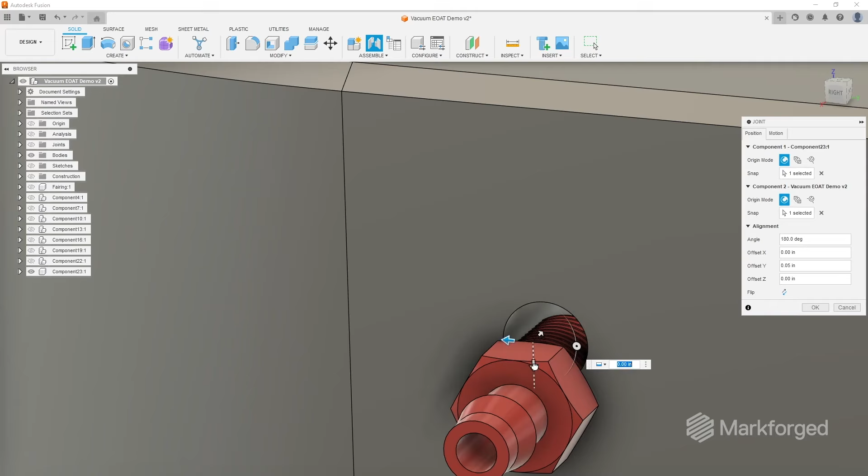Going from a design to an actual part you can use in your manufacturing process is easier than ever. But how can you quickly design a custom part that also utilizes off-the-shelf components?

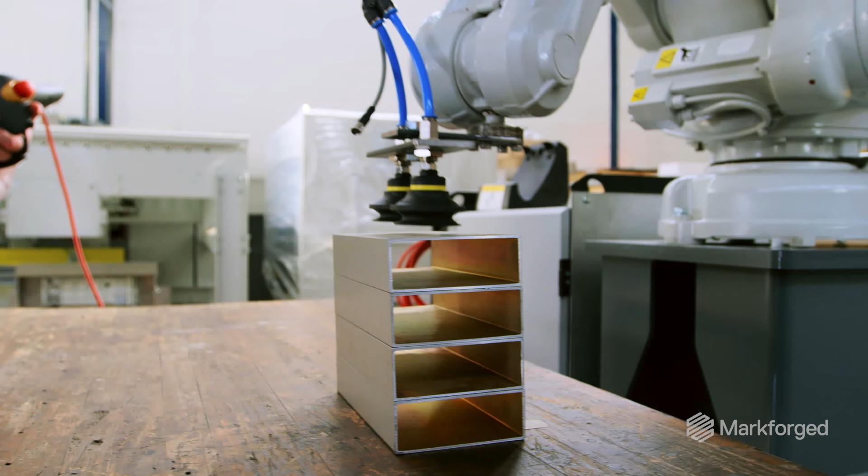So what's a vacuum gripper? A vacuum gripper is a type of end-of-arm tool, also known as an end effector. They're typically used in manufacturing lines to perform a specific function like lifting or sorting items.

Today, we're going to be showing you how you can quickly make a strong custom printed part like this. We'll do a deep dive into the design considerations you need to make when designing for additive, like how to design internal chambers that maintain strong air suction, how you can design features to be compatible with off-the-shelf hardware, and how to properly utilize support overrides to your advantage.

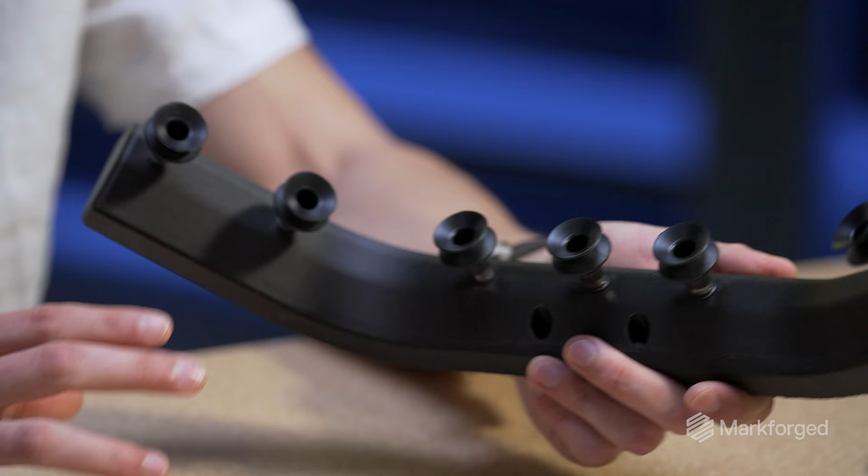By the end of this video, we'll come away with a single part that's strong, reliable, and can be quickly installed. First, let's go over why this works so well as an application for 3D printing. First and foremost, 3D printing offers a pretty wide range to customize your fixture based on your needs. This means you can make something unique to your specific use case or product that will do the job perfectly every time.

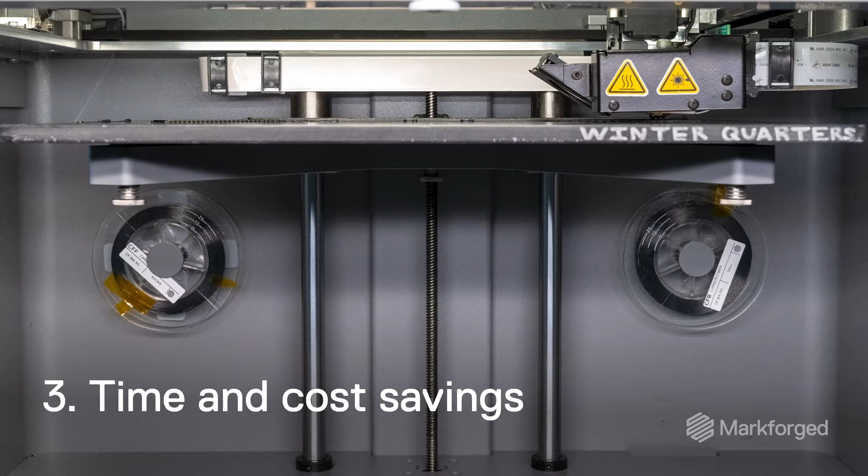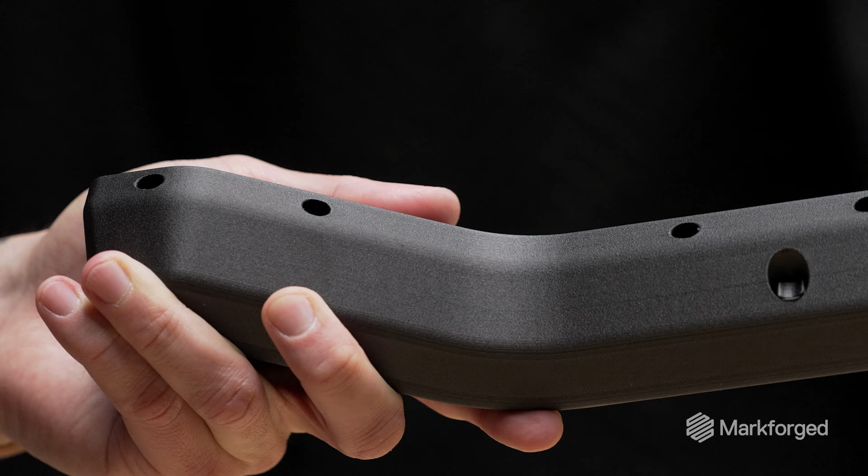Next is the ability to reduce weight. 3D printed parts tend to be lighter than machined or off-the-shelf solutions. Heavy fixtures can put strain on a robotic arm and increase manufacturing cycle time, or require an even larger and more expensive robot to get the job done. Speaking of expenses, 3D printing can drastically reduce the amount of time spent machining or building the right fixture for the job. Lastly, 3D printed parts for end-of-arm tooling allow for simplistic designs that can reduce the amount of failure points.

Take a look at this example part. Say we want to lift this part during the manufacturing process and transport it from one point to the next. The best way for us to do that would be using a vacuum gripper that would make contact with the product and raise it to its next process. While we conceptualized this application, we knew we'd need to incorporate some off-the-shelf components, such as vacuum cups, heat set inserts, and tube fittings. So I'll be sure to share exactly what we used. Let's dive into Fusion and start designing.

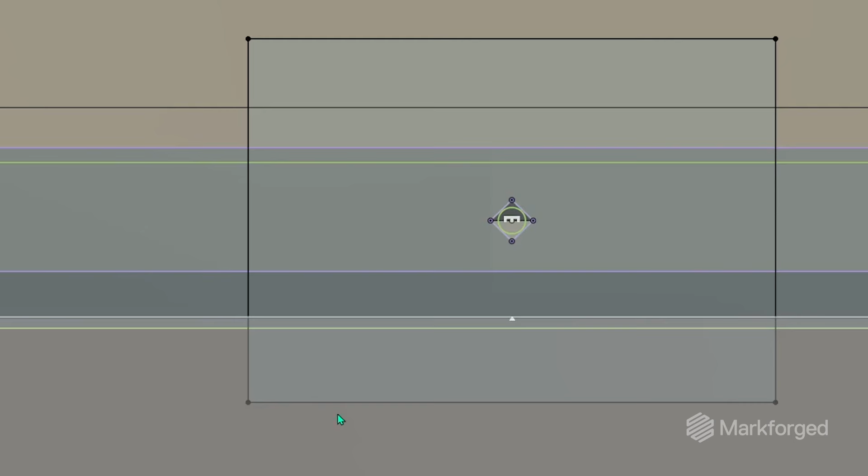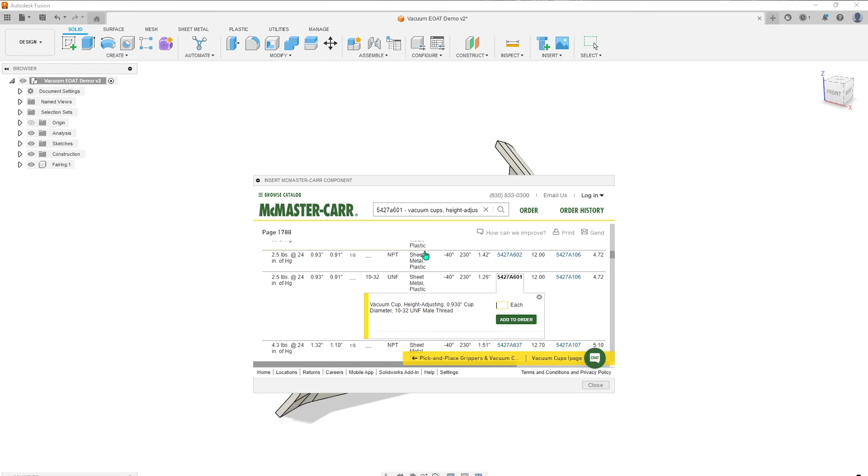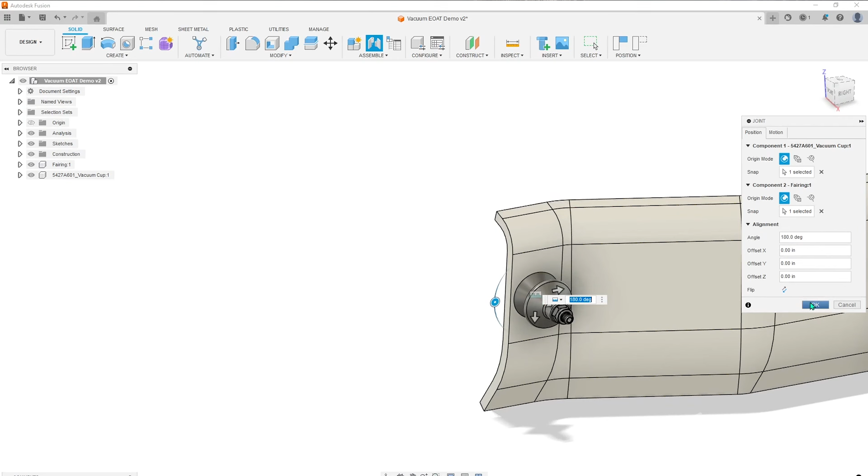So we're in Fusion 360, and we've got our part that we're going to be moving along the factory line. So starting off, we're going to be using our Insert McMaster-Carr component feature. In here, I'm going to be looking up our vacuum grippers that we'll be using and importing these as STEP files. We're going to do some initial rotations on the component so that it's set up for some mates. We're going to do this 6 more times until we have vacuum cups along the full length of this part.

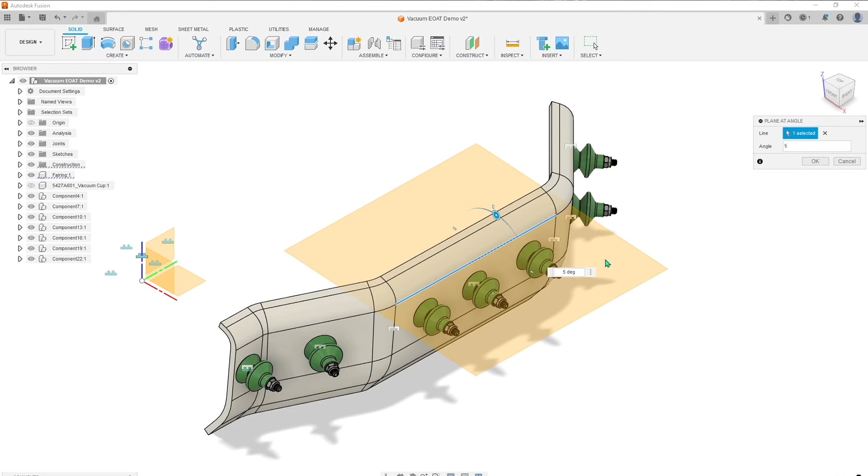Once we have our vacuum cups joined to the component, we're going to start creating some planes so we can start sketching out our vacuum gripper. To create a plane, we're going to go through our Construct menu and choose Plane at Angle. Select our reference line off of the part. We're going to make a slight adjustment of 5 degrees so that the plane is perpendicular with the inlets of the vacuum cups. Once we have our plane, we're going to go through the Construct menu and offset the plane from the one we just created. We're going to make an adjustment of 1 inch just below this one so that this plane is aligned with the inlets of the vacuum cups.

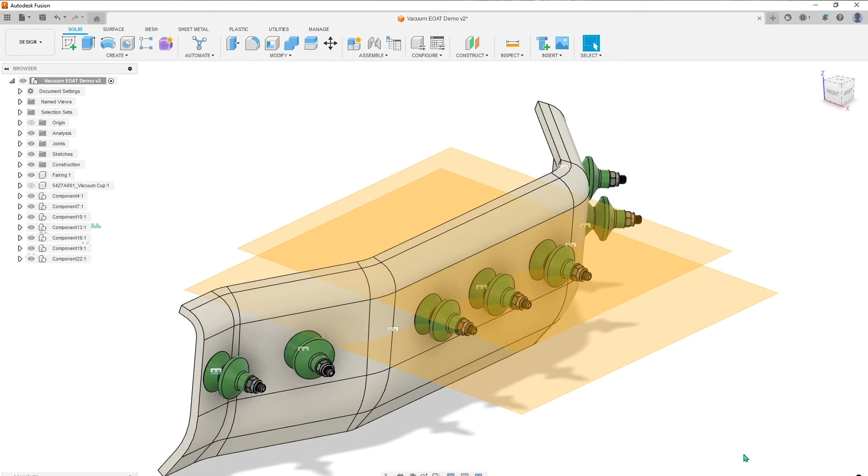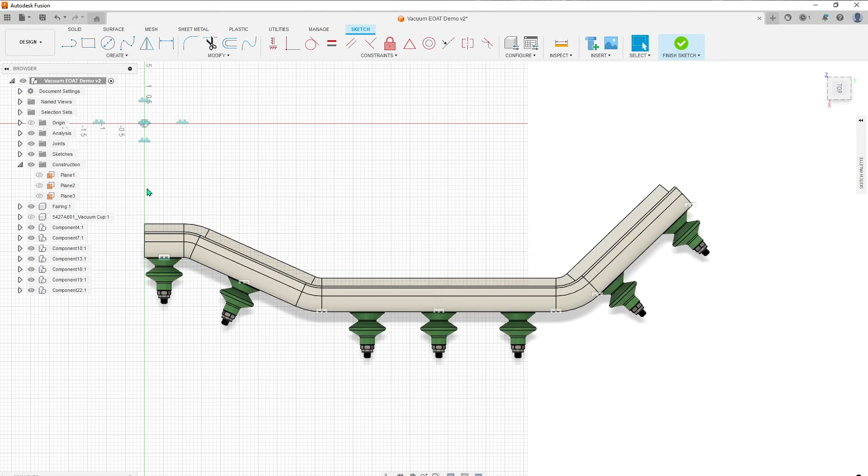So now that we have our 2 planes, I'm just going to hide this top plane here. For our next steps, we'll just be using this middle plane. I'm going to use Create and Create Sketch. From here, we'll start designing and building out the geometries for our printed part. Within our sketch, we're going to create some projected lines from the inlet fittings of each of these vacuum grippers. Once we have our projected lines, we're going to create some points.

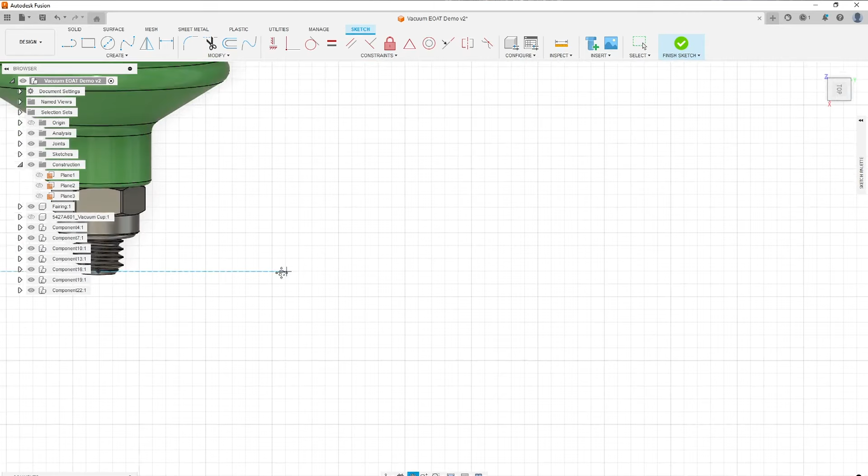From here, we're going to create some lines so that we can offset the distance. We want these lines to be offset from the grippers by an equal distance. So we're going to go in, we're going to add some sketch dimensions. We're going to offset these by 1/2 inch. Once we constrain one, we're going to be using our constrain equal tool to make all of these lines the same length.

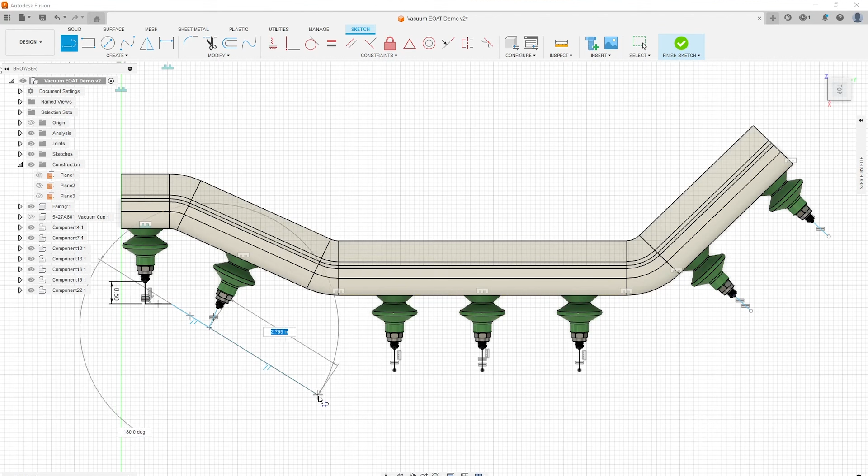Now that we have our lines offset from the cups, we're going to start building out some sketch lines for a 3D printed part. Let's speed through this. I'm going to exit out of the sketch now that it's done, and we'll move on to our next steps.

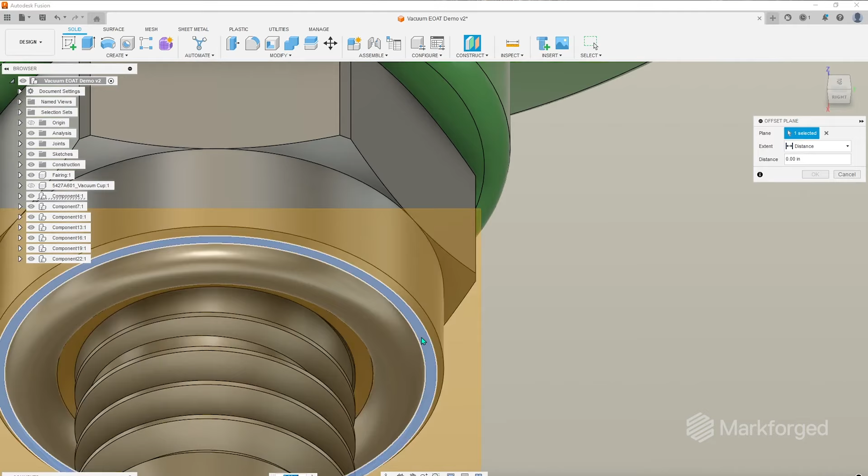So now we're going to create planes off of each of these vacuum grippers so we can start creating the 3D printed part. I'm going to use just construct and offset planes, and I'm going to be selecting this flat surface on each of these grippers.

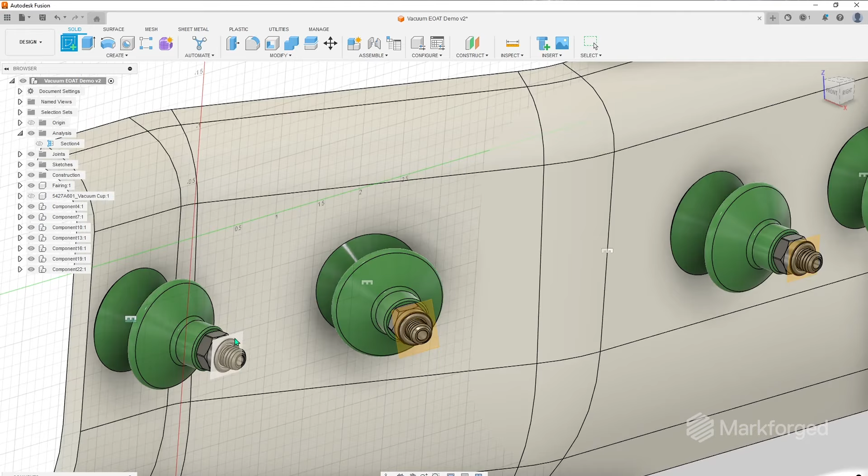Once we have our planes made at the ends of each of these vacuum cups, we're going to be creating sketches for each of these for the internal chambers that will be going into our printed part. I'm going to start with doing a create sketch, and let's use one of these planes here. I'm going to actually project this circle so that I can get a center point and use this as our reference.

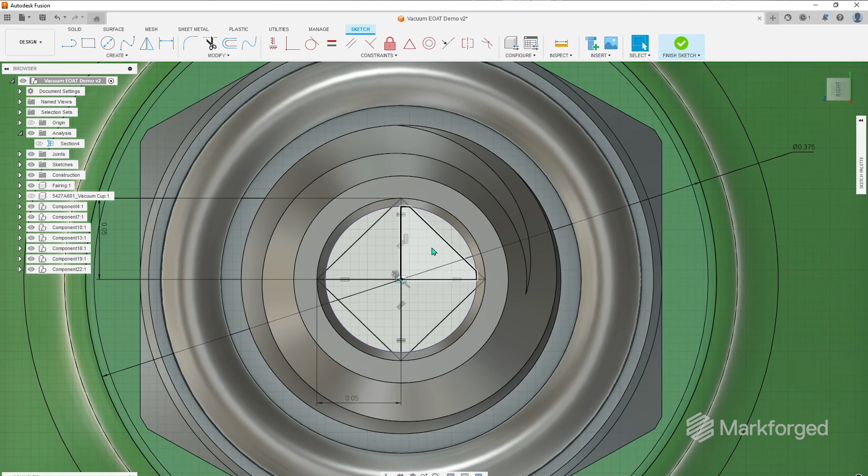So I've added in this diamond shape in here with 45-degree angles. The reason for this is once we're printing, to avoid overhangs for a printed part for internal chambers, we want to keep these angles greater than 40 degrees so that supports aren't automatically generated. Once we've done the sketch on one of these, we're going to do it for each of the planes going off of these vacuum grippers.

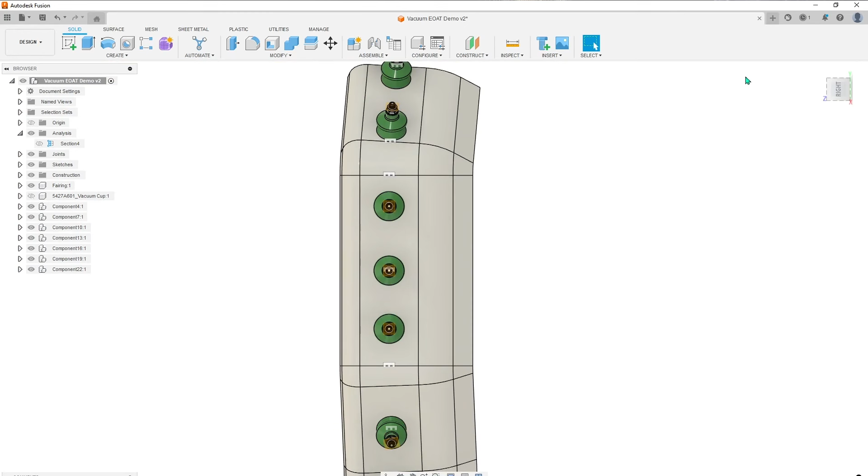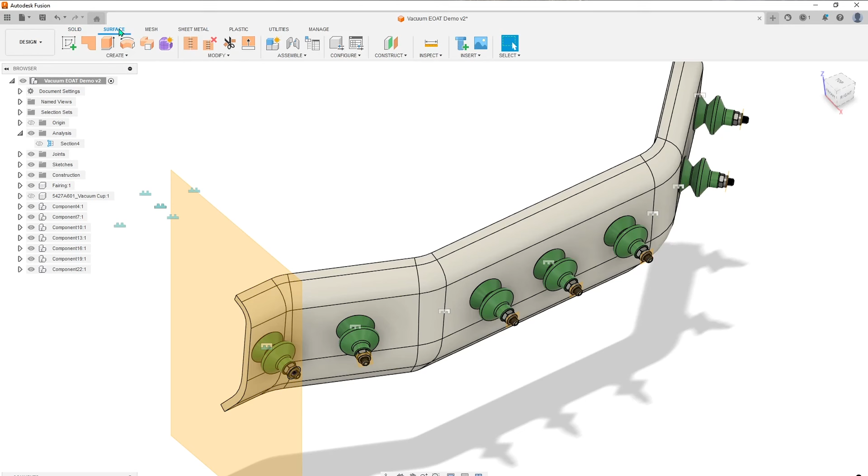Now let's focus on building out some geometry for a 3D printed part. I'm going to start by creating another sketch plane off the edge of our part that we're moving along the assembly line. Next, I'm going to create some offsets from the component here. I'm going to go to the Surface tab under Create and use our Surface Offset option.

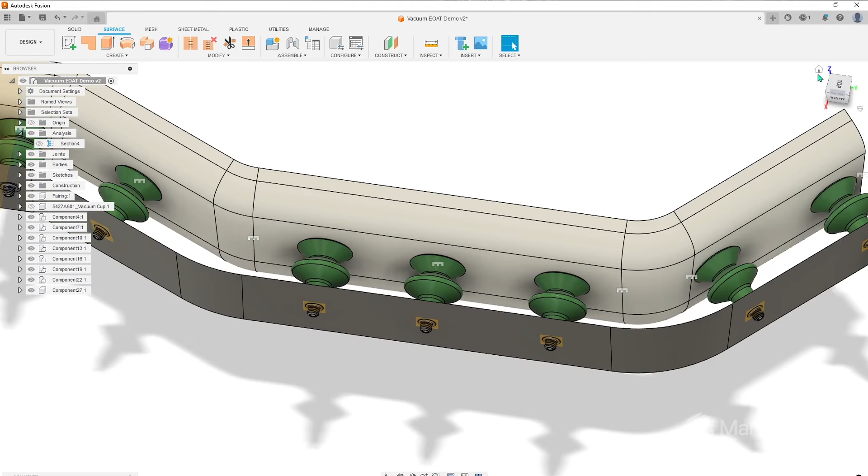I'm going to select all the surfaces where the vacuum cups are in contact, and I'm going to offset them 1.1 inches, where the plane will then be coincident with each of these inlet fittings. Once we have this first offset, we're going to do it a second time so that we have some geometry to build out the 3D printed part. We're going to use offset again, select those same surfaces that we just created, and we're going to offset at a distance of, let's say, 0.7 inches.

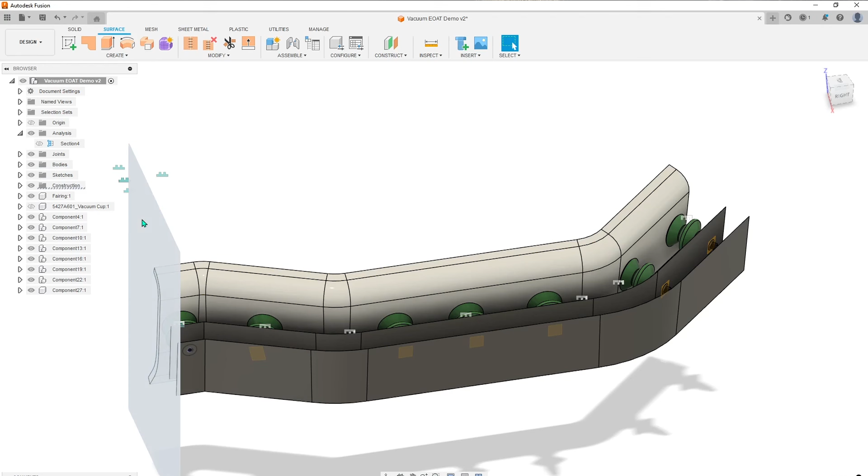Now that I have the second plane, I'm going to do an extension so that we have a little bit more length on this part. I'm going to extend it 0.2 inches.

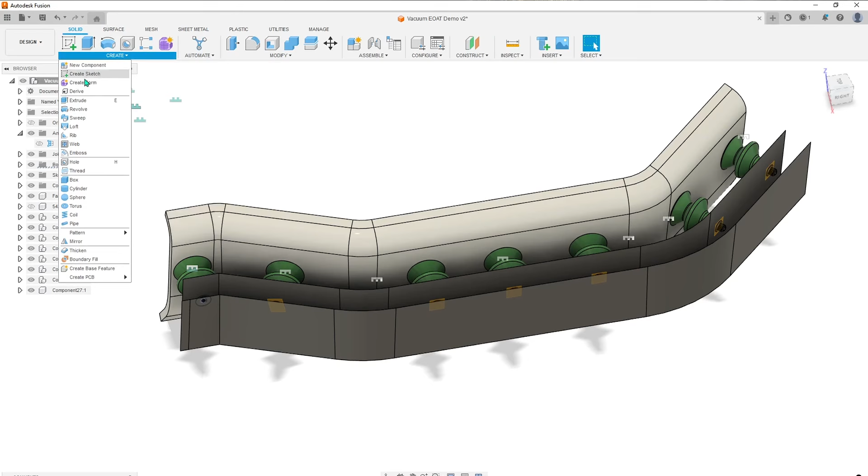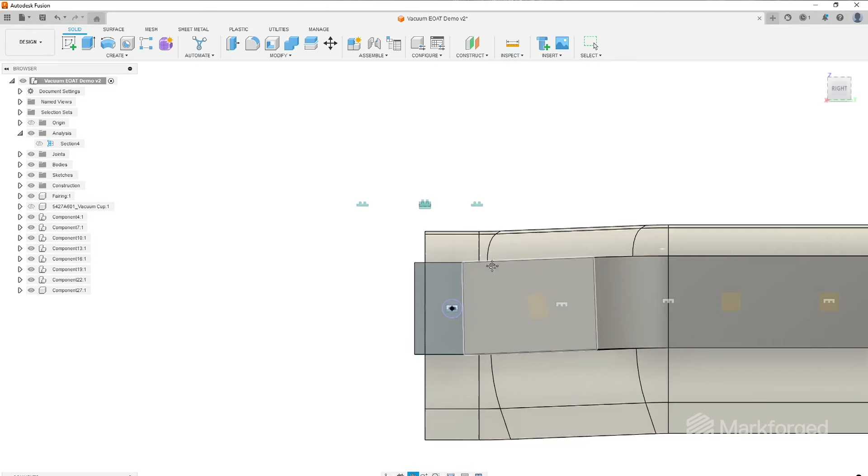Now that we've got our surfaces extended, we're going to do sketch planes that align with the inlets of each of the vacuum cups. I'm going to start by going over to the solids, doing a create sketch, and selecting this first plane. We are going to project the hole dimensions that we had created in the past, and we're going to get points created for each of these. We're going to do this for each of the vacuum cups. I'll skip ahead once I'm finished.

Now that we have each of our holes, we're going to go forward and create a line between all of these so that later on we can use the sweep function to create a 3D printed part. Once we have our sketched line connecting all of these parts together, we're going to create another sketch that's perpendicular to this line so that we can start building out our printed part. I'm going to open up the plane that we had on the side and create a sketch from that.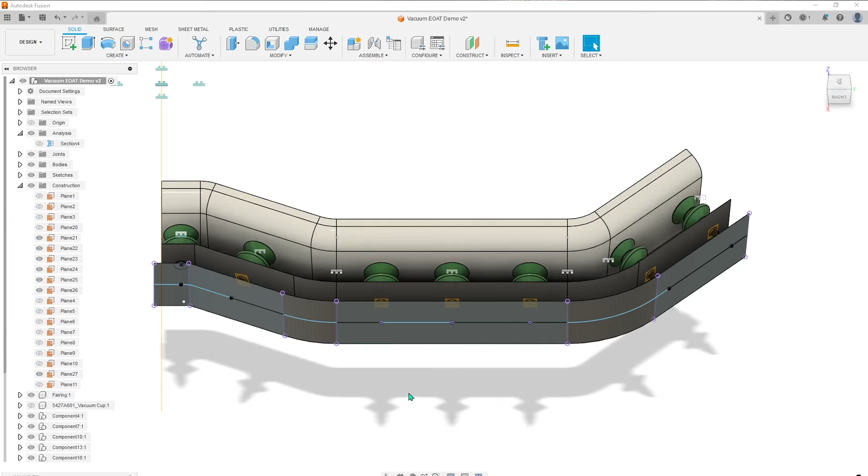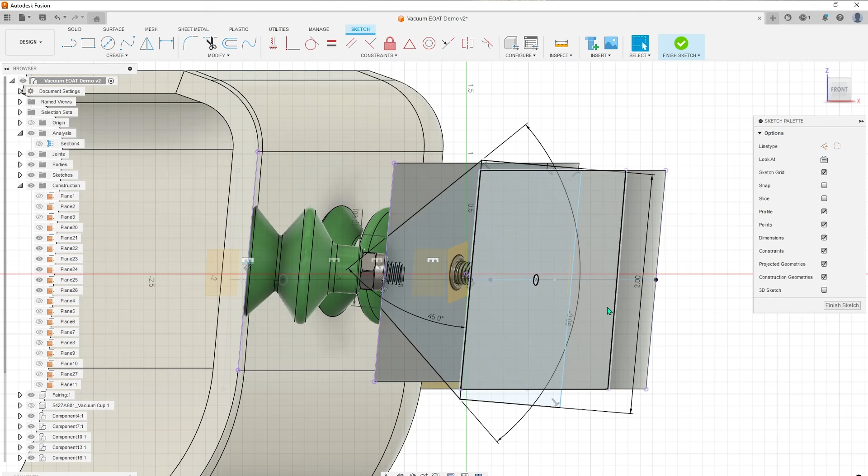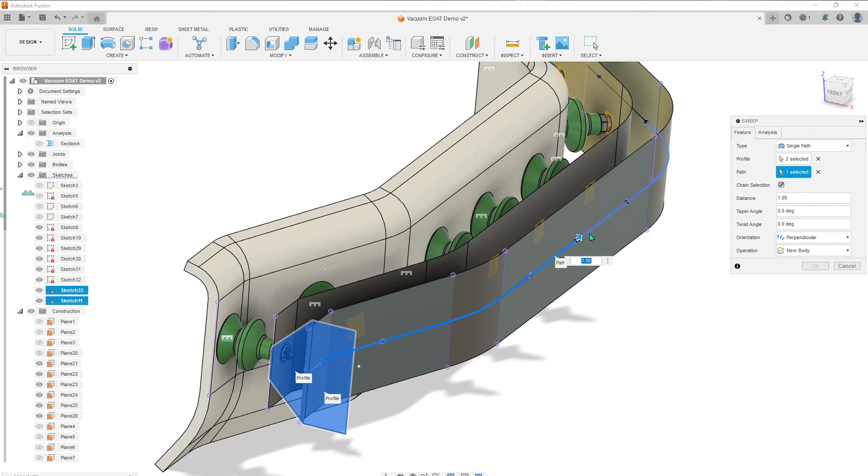Now that we've got the sketch for our 3D shape along with the sketch of the spline line on the surface, next we're going to go through and we're going to use the sweep function here. Within here, we're going to use a single path and we're going to be selecting our profile from our sketch, along the path of that sweep spline line. We want this to be a new body.

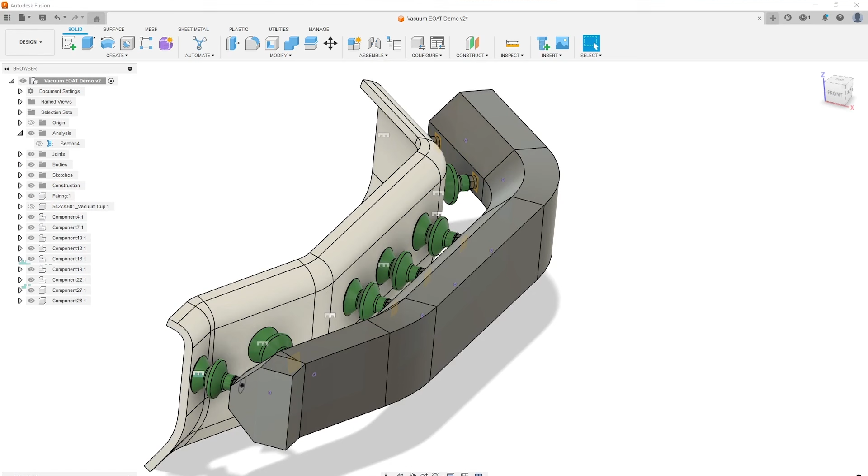And okay. Great. Now we have our 3D printed part and we're going to hide the bodies that we don't need and only focus on doing edits to the body that we just created. We're going to hide each of these vacuum grippers as well as our tooled part. We still have our planes from before where each of these grippers line up. We want to start creating holes that go into here so we can start working on the internal vacuum chamber.

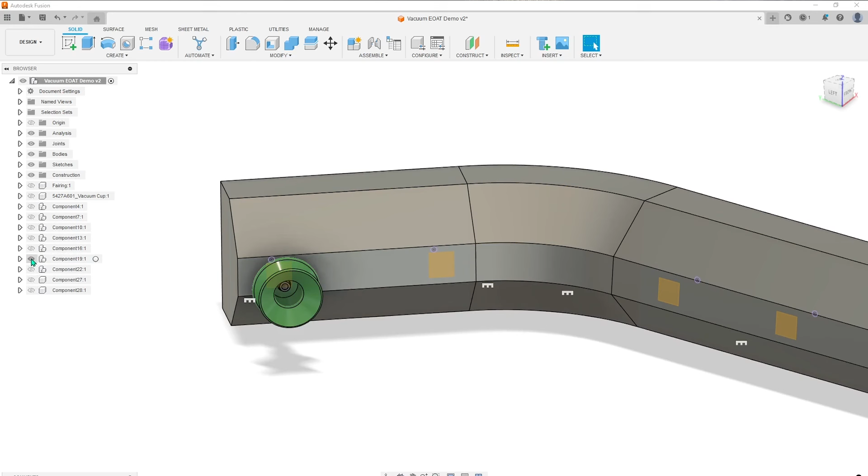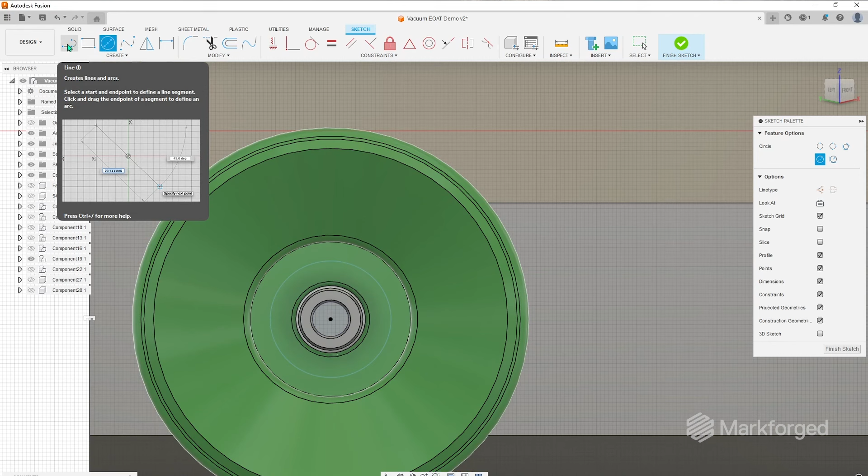I'm going to start with this feature over here and I'm going to create a sketch on that plane. Within this plane, I'm going to project the hole going into the part from our vacuum gripper and start building some geometry, as well as creating that diamond shape to avoid any overhangs from being created when we start to 3D print this part. So now that we have our sketch, we're going to be using the extrude cut feature to cut into our part 0.8 inches.

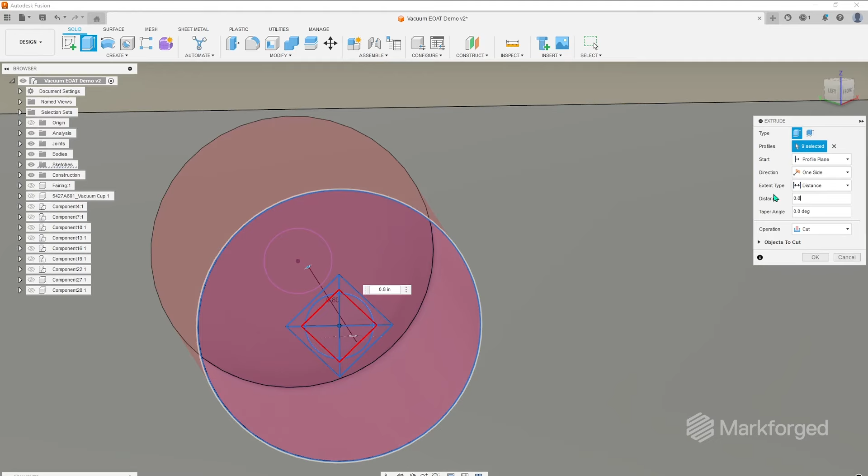Once again, we're going to repeat this process for the rest of the vacuum gripper inlet holes. Now let's work on creating our internal vacuum chamber. I'm going to create a sketch off of this plane. We're going to be using that diamond pattern once again.

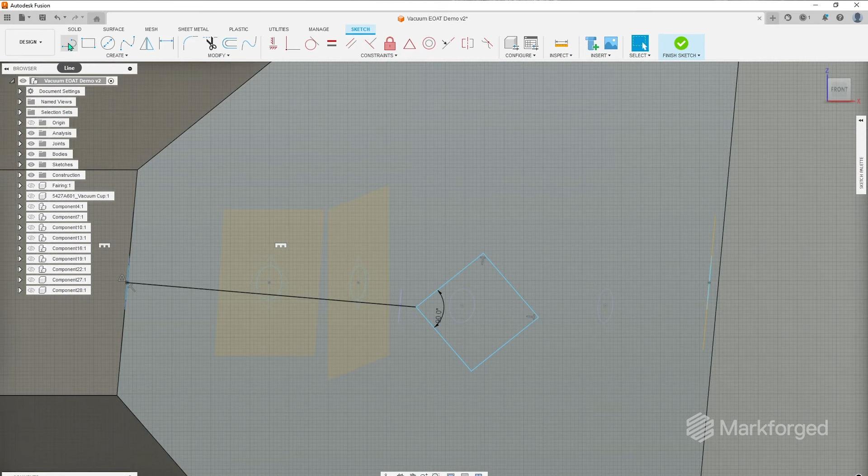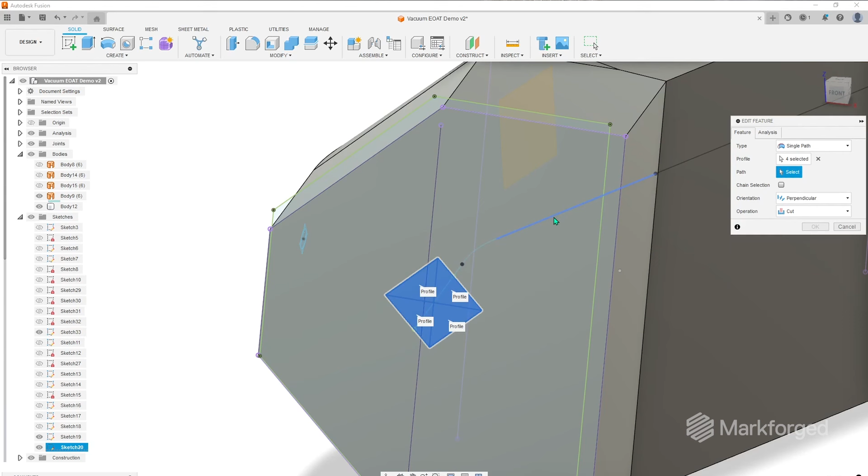All right, we have our sketch. We're going to finish this one and we're going to next use the sweep feature to create a cut. We're going to be going off of the sketch that we just created and choosing the profiles within there.

So now that we have our vacuum channel created, I'll show you a section view to show how it's lined up with each of those inlet fittings for the vacuum cups.

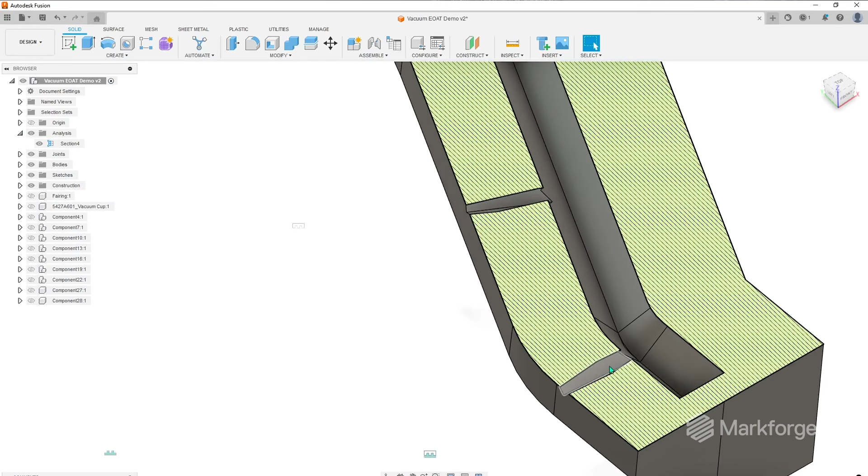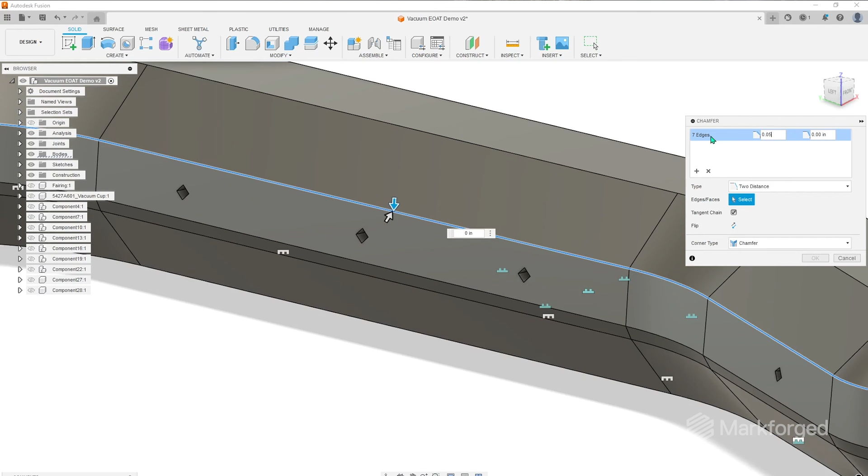Our next section to make our part cleaner is by adding in some chamfers and fillets. These help cut down on these hard edges that we see along the part. So we'll add some in right now. And then lastly, let's add in some fillets as well to get rid of some of these hard cut corners.

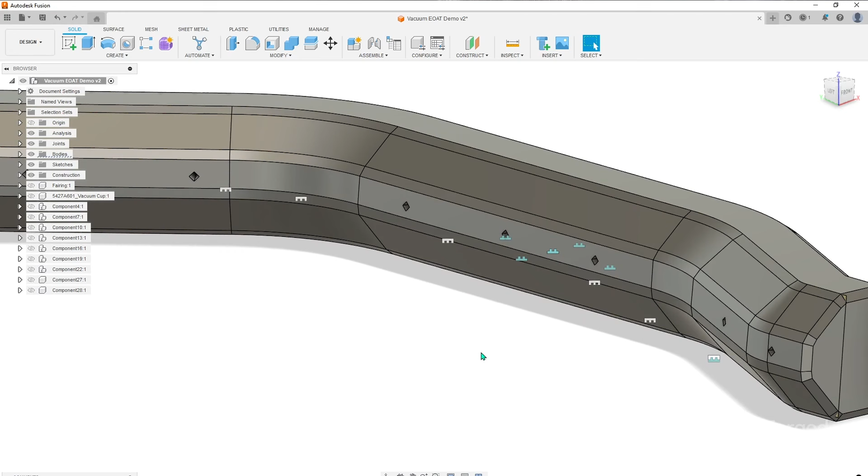Now that we have our chamfers and fillets, let's focus on adding how this component would be attached to the end of arm tooling. We know that we want our tooling to be centered on this part when it's attached, so we're going to create a sketch. We're going to project this centralized hole here, and we're gonna add some more lines to it.

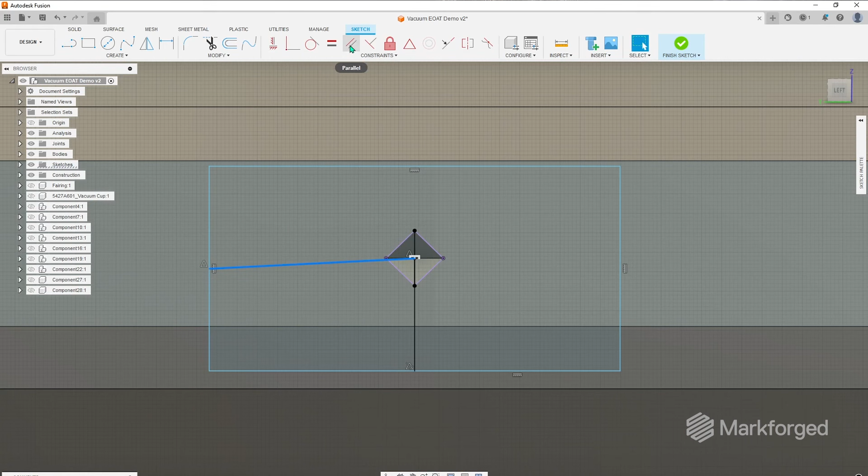Next, we're going to be using the hole tool to create the counter bore holes. We're going to be going off of the sketch plane that we just created, and selecting the 4 points along here.

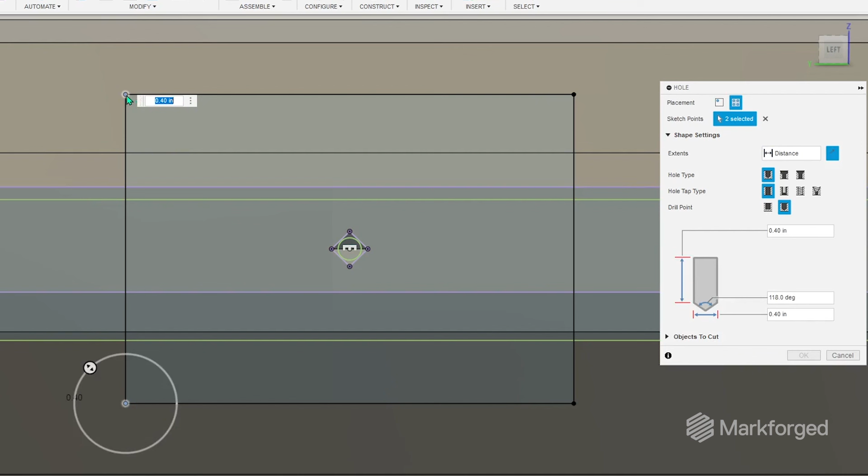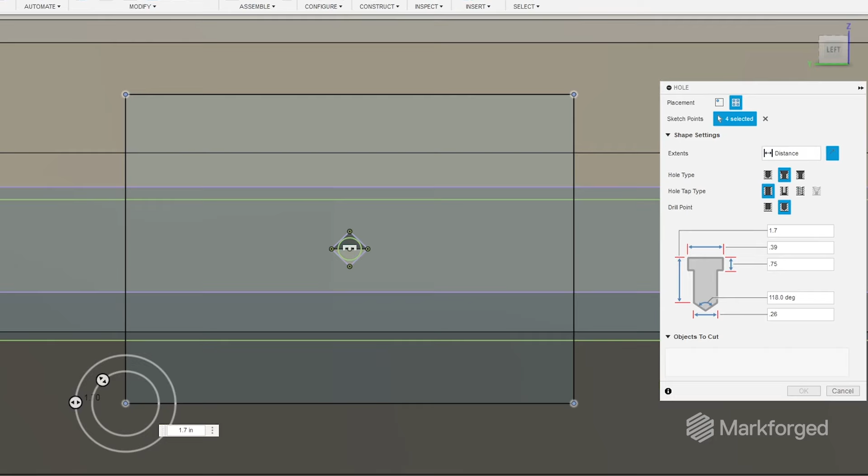We're going to use a counter bore hole with a simple hole tap type and an angled bottom, so that it can fit our socket head screws that mount directly into our robot. I'm adding dimensions that are consistent with the screw size from McMaster. All right, here's our mounting points.

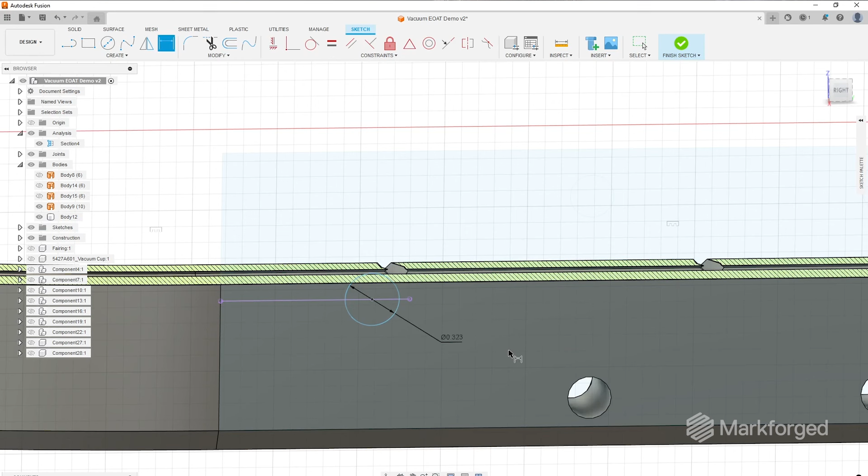Next, we're going to create another sketch plane for the vacuum plumbing from the robot into the end of arm tooling. I'm going to be dimensioning this hole 8.2 millimeters, which fits our plumbing hardware that is going to be imported in later in the process.

Now that we have our hole, we're going to create an extrude cut with a distance into the part until it makes contact with the internal vacuum tubing.

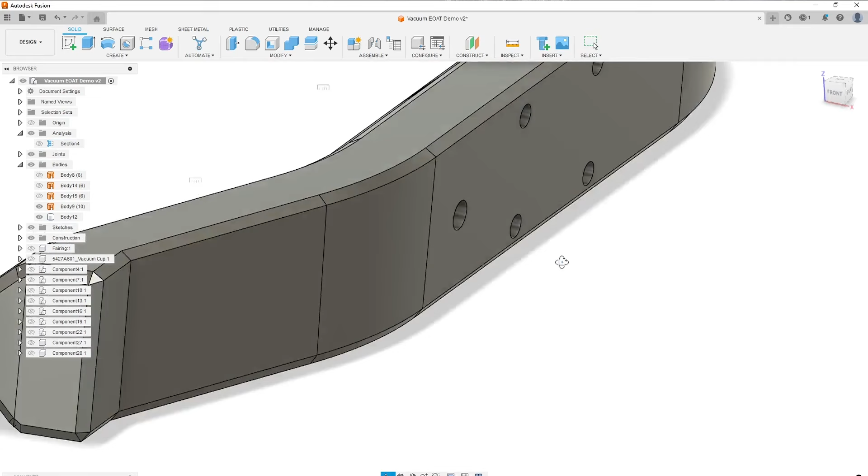Let's go back and insert another McMaster-Carr part. This is a tube fitting. Next, we're going to use a joint function to make sure that this is aligned with our component.

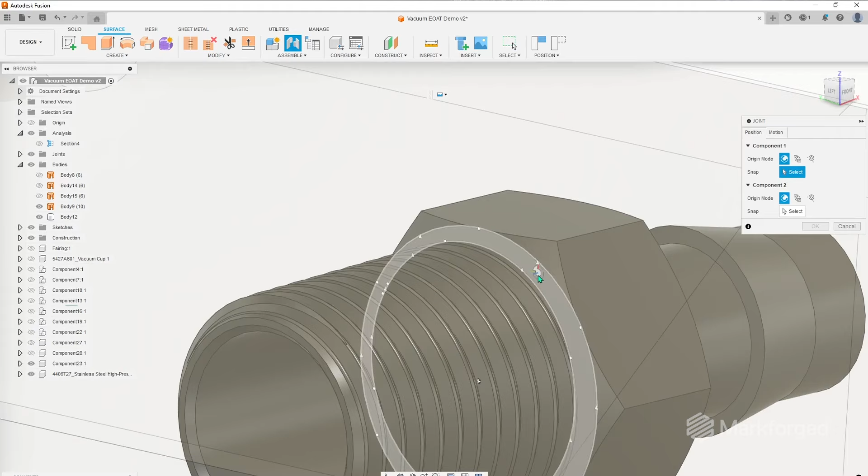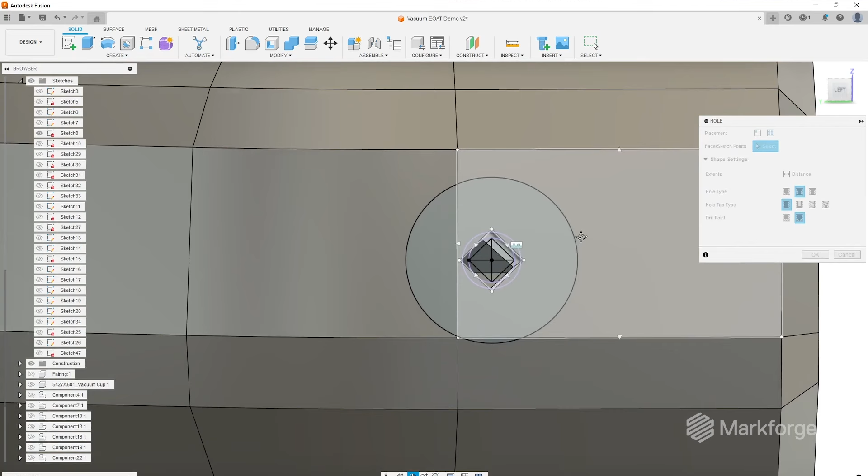All right, we're almost done. Our next step is to use the hole feature for our heat set inserts going into our part. The dimensions that I'm putting on this hole are specific to the heat set insert that we're going to be importing.

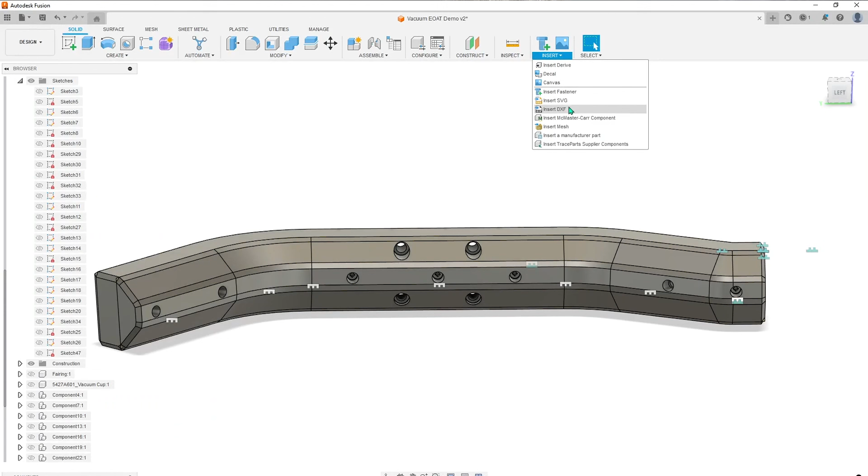Now that we've finished one of our counter bore holes, we're going to do the same thing for the rest of the heat set insert locations. Skipping ahead, now that we have all of them complete, we're going to do our last step of importing our last McMaster parts. I'm going to do some orientation changes and start adding some mates.

I'm going over to the assembly tab and then using joint to create some joints between our imported components and our finished component. I've got one created here. I'm going to do the same for the rest of the holes and continue from there.

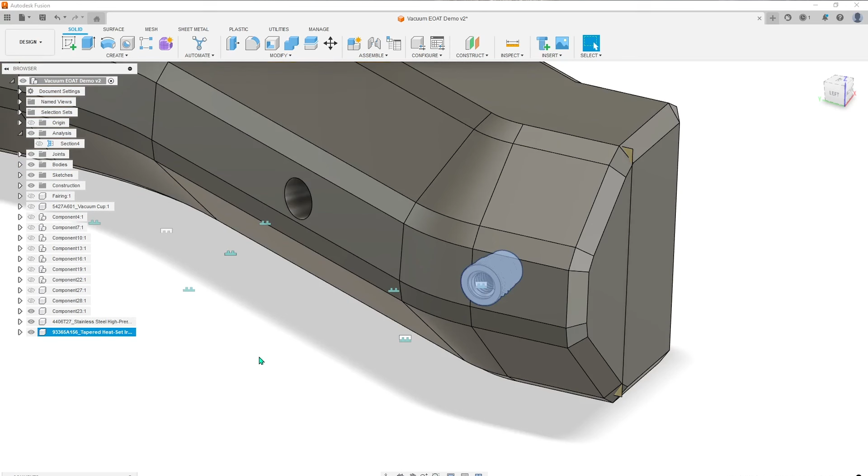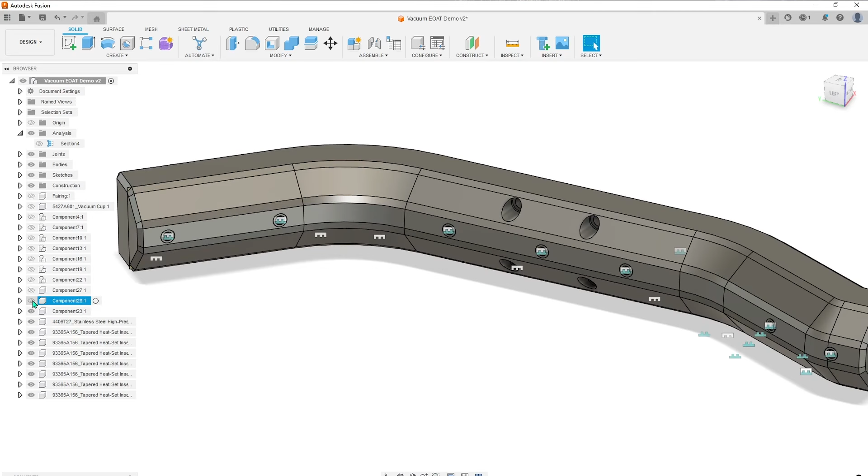I'm going to copy and paste this heat set insert multiple times so that we have enough for the rest of our part. Now that we have all of our heat set inserts, let me unhide the rest of our components and we can see our finished product. And we're done. Now let's head over to our slicer.

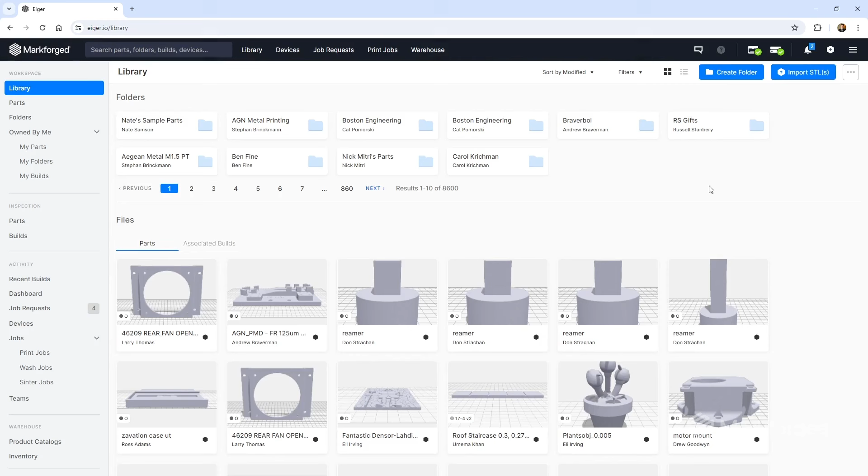Because we're Markforged, we're going to be using Eiger as our slicing software. But a lot of the features that we're going to be covering can be used in other slicing applications too. To start, we're going to upload our STL file.

We're going to be choosing our printer type. Let's use FX10 as a good example. We're going to do some manual rotations so that it fits on the print bed, and we're going to lock it into place.

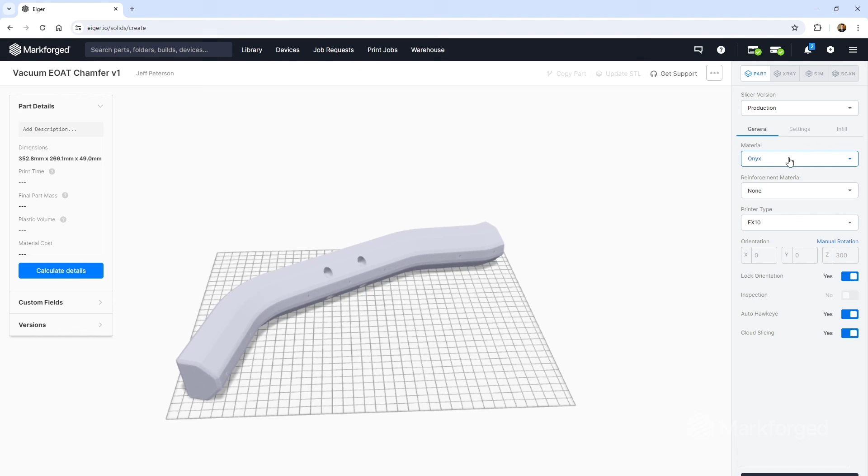From here, we're going to be printing with Onyx, as well as let's add some reinforced carbon fiber to stiffen up this part. One of the things we want to note, especially when using vacuum, is the roof and floor layers. Default in Eiger is 2 wall layers and 4 roof and floor layers. We're going to up these numbers to ensure that we're having sufficient vacuum when these chambers are being used.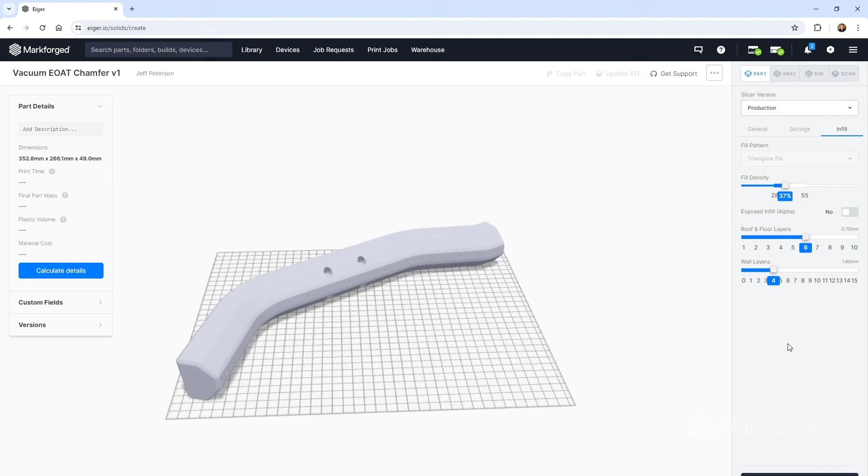I've upped these now to 6 roof and floor layers and then 4 wall layers. From here, I'm going to hit save and slice the part. So now that our part is sliced and ready to go, let's validate and make sure that we're printing it the way that we want. Let's go into the X-ray view and look at the 2D and the 3D views.

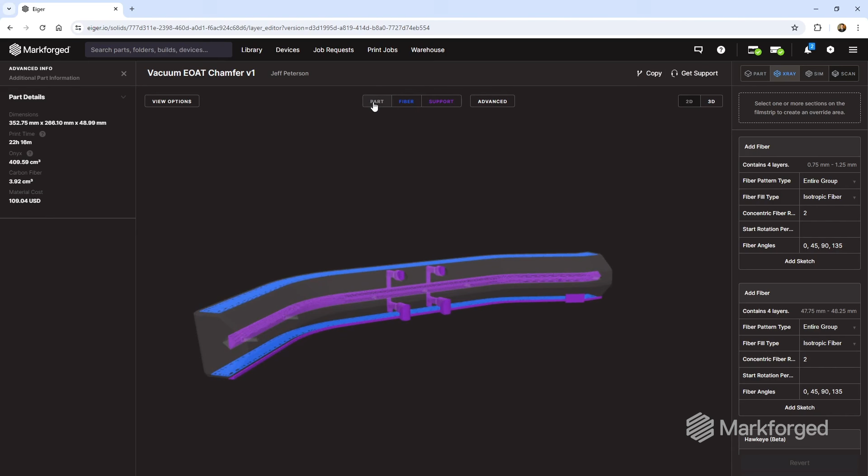First thing to note, from looking at this part, we have fiber on the bottom couple layers and fiber on the top roof layers. Additionally, we have some support on the inside of this channel that we want to get rid of. To do that, we're going to go to the 2D view. We're going to scrub through the different layers until we start seeing the internal chamber where the supports are being generated.

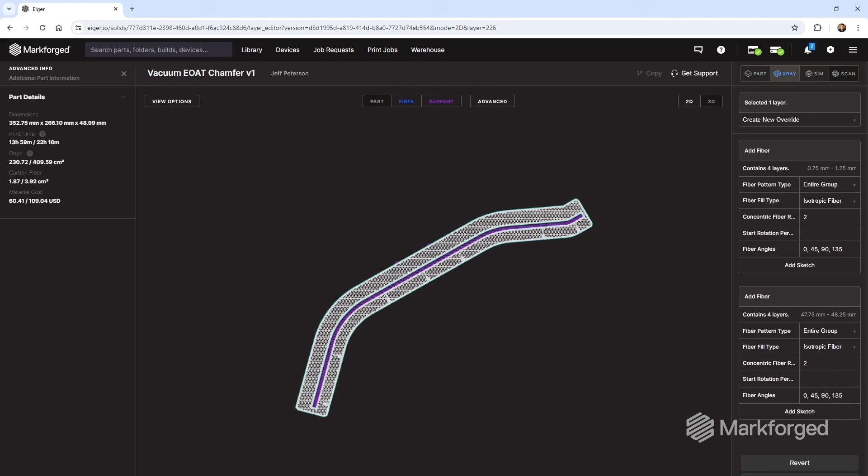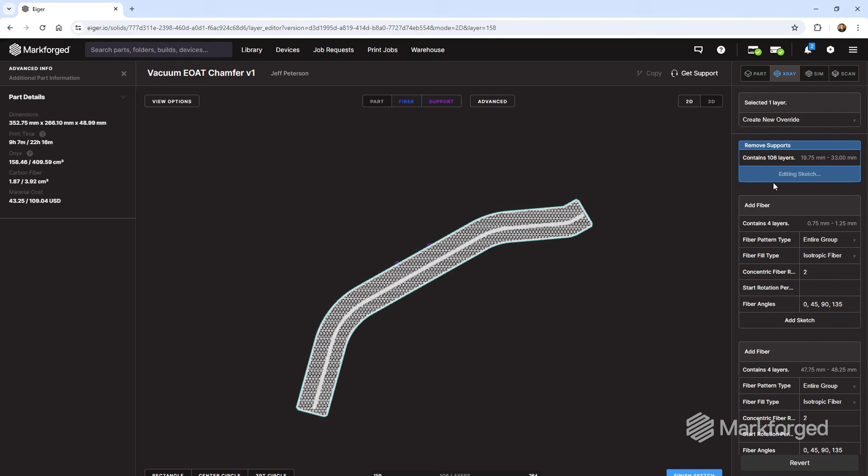From here, you can see it's going all the way from layer about 160 all the way up to layer 264. I'm going to go back into the 3D view, go from layer 160 and highlight it all the way to layer 264 or so. In here, I'm going to create a new override and remove supports. I'm going to add some sketches in here and cover up those sections that we don't want.

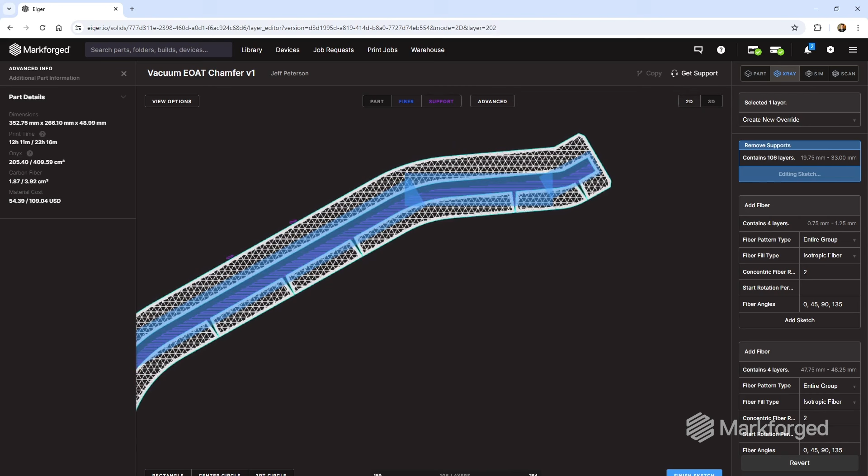Next, just to validate, I'm going to scrub through these layers that we're using again and make sure that all of the areas of unwanted support are being covered by those sketches that we just made. Awesome, that looks pretty good.

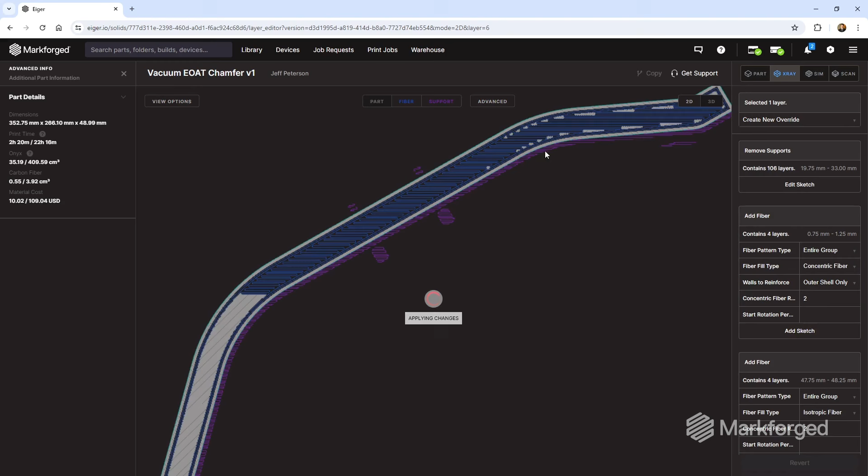Going into this next section, let's look at the fiber that we have. From the 2D view, looks like we're using isotropic for the part, and there's some areas that fiber wasn't automatically generated. To increase strength of this part, I'm going to actually change this fiber type to be concentric fibers that follow the pathway of the part. For additional rigidity, I'm going to change these actually to 4 and apply this sketch. We just did that on layers 7 through 10 for the bottom.

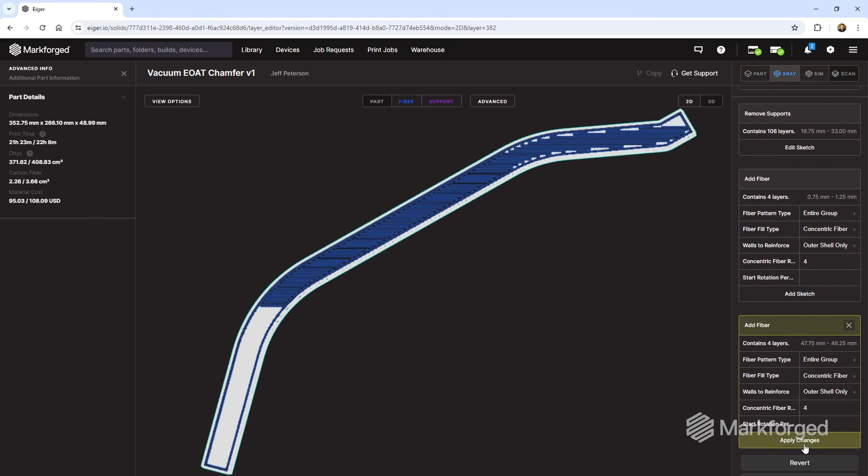We're going to do that again for the top, change these from isotropic fibers to concentric fibers from the outer shell and up these to 4. Lastly, hit apply, and let's make sure that these are okay. These are on layers 383 to 386. Looks pretty good to me.

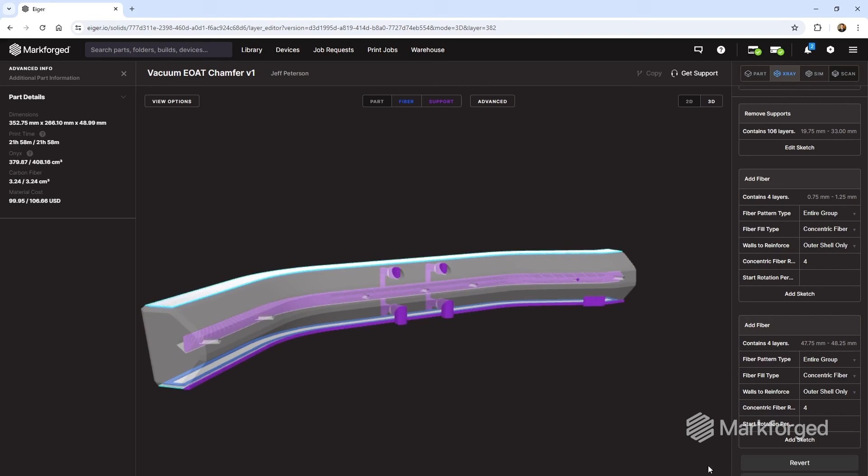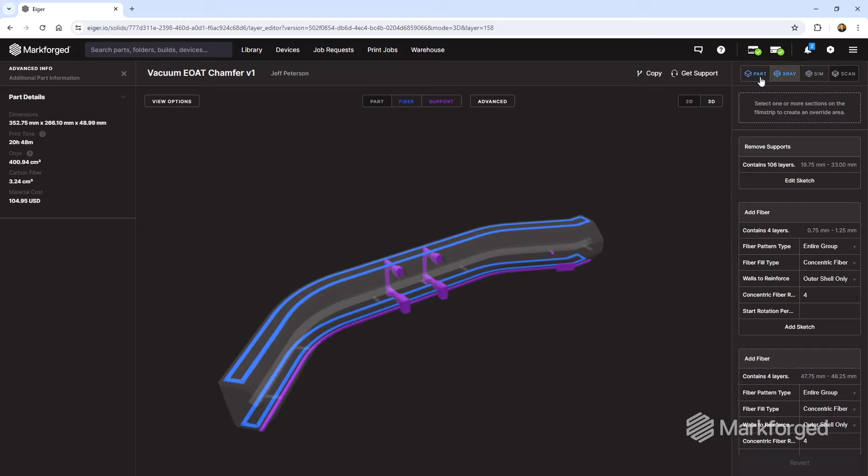Lastly, let's just look at the 3D view and go through the whole part to make sure that our areas of override and our areas of fiber are correct. Next, we're going to reslice and save after that looks good, and we're going to wait to see our results. Now that it's sliced, let's check and make sure that our overrides were correct by scrubbing through this part. Looks good to me. Last step is to just press print.

So let's recap. We took our product specifications and we designed our end-of-arm tooling based on these considerations. In CAD, we designed our part based on the off-the-shelf components, the grippers, the heat-set inserts, and the vacuum hardware. We offset our printed end-of-arm tooling based on the sizes of these off-the-shelf components, and we designed our mounting points based on the robotic arm.

Additionally, for a 3D printing process, none of our internal vacuum channels had overhang angles greater than 40 degrees, and our hole diameters are larger than the minimum viable size our printer is capable of. Once the part is designed for the printing process, we moved over to our slicer.

In Eiger, we increased the wall, floor, and roof layer thicknesses to have sufficient vacuum through the printed channels. Additionally, we added fiber for reinforcement, and we used support overrides for any unwanted supports that would be normally generated. And that's it. This part's ready for the factory floor.